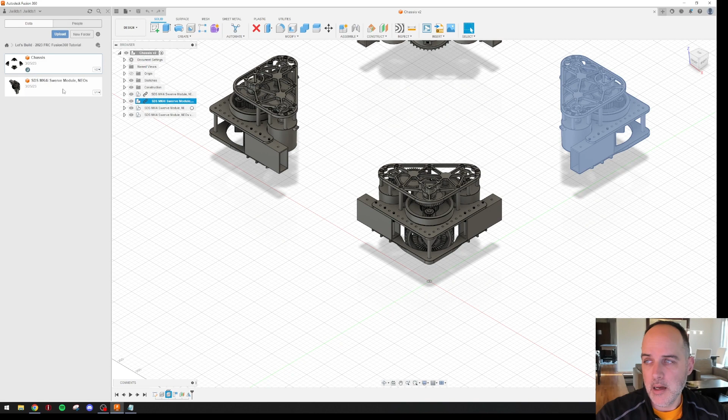So we'll open up those files and find this. Now, one thing I haven't taught yet: you see how I've selected the face of the 1x2 there? I'm going to right click on it, and that brings up a menu. Look at this tree over here, it's three screens deep. I want to find that part, so I clicked on it and I'm going to find it in the browser. This will automatically find that part in the tree for us, so now I can select the whole part, not just the face.

Then I am going to delete that, and hopefully this works. Yep. Then we'll do the same thing for this one: right click on it, find in browser, and delete that. Now let's save this part. Before I click save, watch this area. You see how it says version 1? When I click OK, it'll automatically update, you can see the wheels turning, and this will change to version 2. See, right there. Now watch what happens when I go into our main drawing.

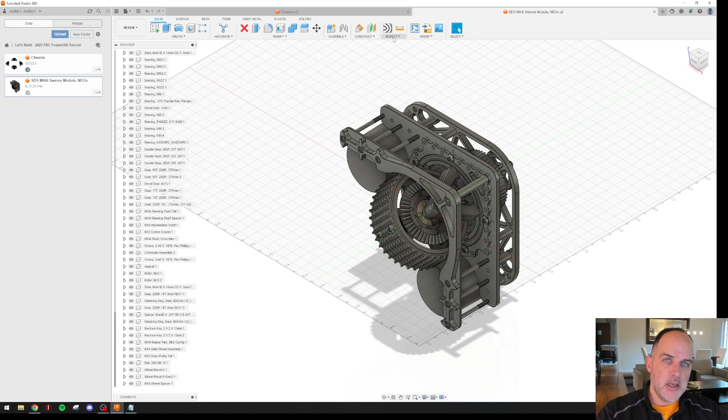The first thing you notice here says this component is out of date; to update, use Get Latest in the design workspace. Basically, Fusion knows I made a change to this referenced part, and this screen shows old data. To update it, I can go one of two ways. One, I can click this button at the top, and it'll update everything; if I had made edits to four different parts, it will update all of those. Or I can directly click Get Latest Version. We'll do that. And there you can see our 1x2 extrusions are now gone.

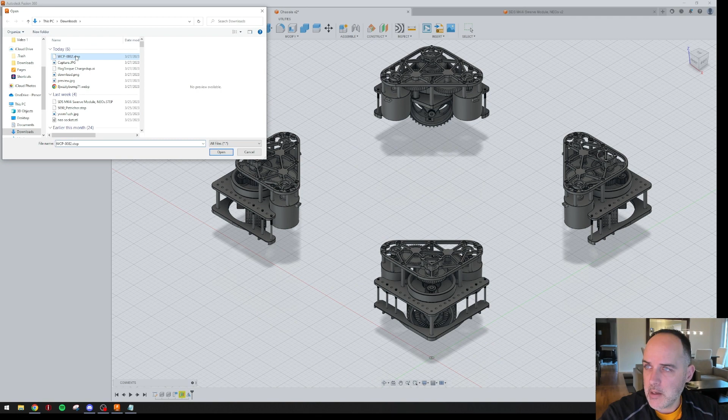Okay, the next thing we need to do is put together our structure of 1x2 aluminum. Unfortunately, the stuff we used, VEX VersaFrame, doesn't have CAD models, but it's not a big deal. West Coast Products has CAD for 1x2 1/8" wall. The only difference is there are no holes in this part, which is not a big deal. I've already downloaded the file, so I am going to upload it. Now wait. All right, it's complete. Close out of that.

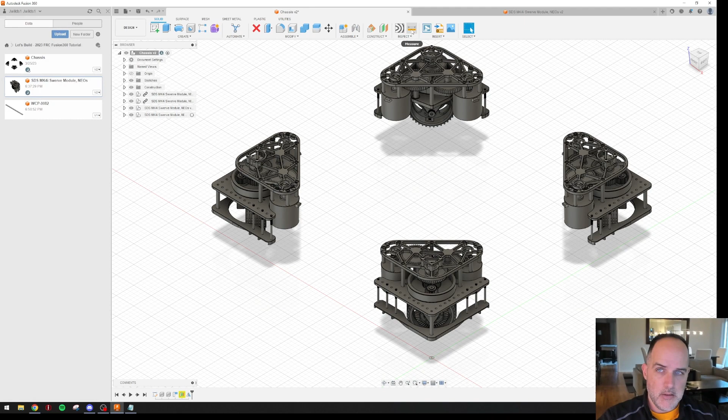So now, how long do we make it? If you noticed, before I blew away those 1x2s, the extrusion started and ended right at the midpoint of this hole. So I need to measure from this hole over to the mating hole over there. We'll zoom in. One thing to remember with the measure function is Show Snap Points, which adds more pick points when you measure. I'll check that box, and turn on my secondary units, inches. Now you can see plus signs in the center of those holes. Those are what we want to reference.

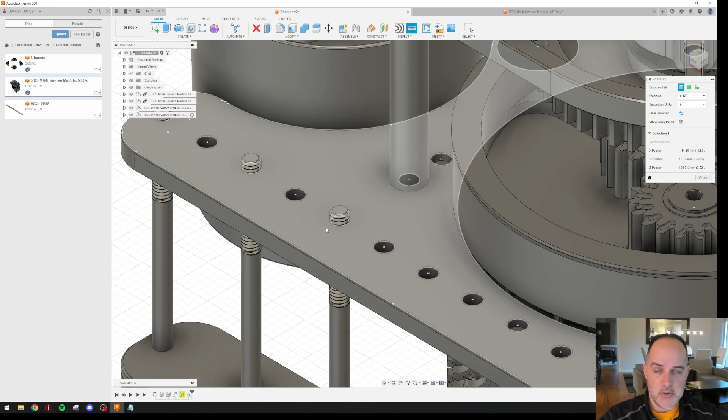Now to make them stick, sometimes what'll happen, you see how when I hovered over this bolt, it bombed onto the threads. But what I want to do is press and hold Control, and that's going to keep those snap points active. So then I'm going to select that snap point, so it's picked the center of that hole. I'm going to zoom out, pan up, and then the same thing here.

I'm going to hit Control, and then I'm going to click on that point right there, the center of that hole, and there's my dimension. So you can see here that's 16 inches. Okay. Now, to get that component right, I'm going to open up that step file. You can see here, long stick of it. I think it was 51 or 59 inches, but I need a 16-inch component.

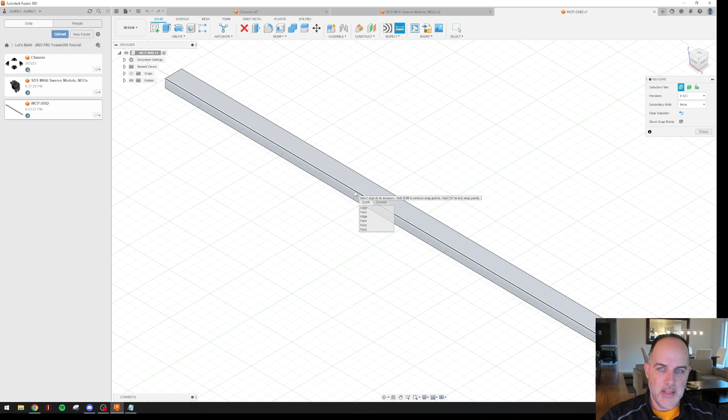Okay, so I'm going to introduce what's called the press pull command. What the press pull command is, it's an operation that lets you shrink or grow parts, mostly flat surfaces. So that's up here in the modify command. But the first thing is I need to know how long this is. So I'm going to hit inspect, measure, and then I'm going to select this edge. Now I got this menu to pop up by clicking and holding on that edge. So I'm going to select that edge.

And it's telling me, yep, it's 59 inches. But I needed 16. 59 minus 16 is 43 inches. So I need to make this 43 inches shorter. So what I'm going to do, I'm going to press pull. Okay. Then I'm going to pan down here. I'm going to zoom in on this surface here, right there. So I've selected that face.

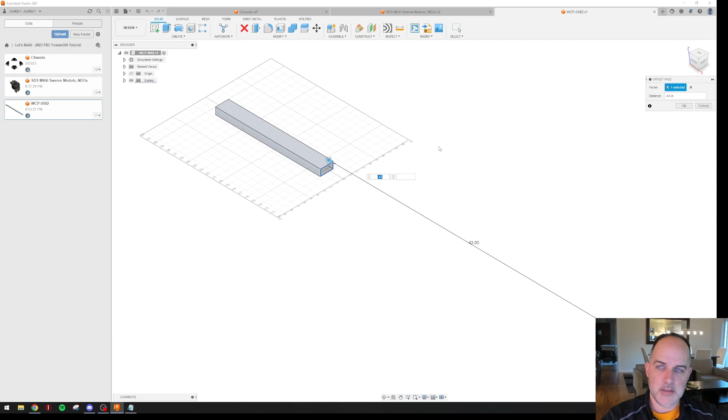And if my memory is right, I said we needed it 43 inches shorter. I'm going to make it negative 43. Zoom out before we accept the changes. Looks about right. I'll click on OK. Now, we've modified this part, but I don't want to lose the original. I want to create a new part out of this. So I'm going to do a file save as, so that way I can make a 16-inch part.

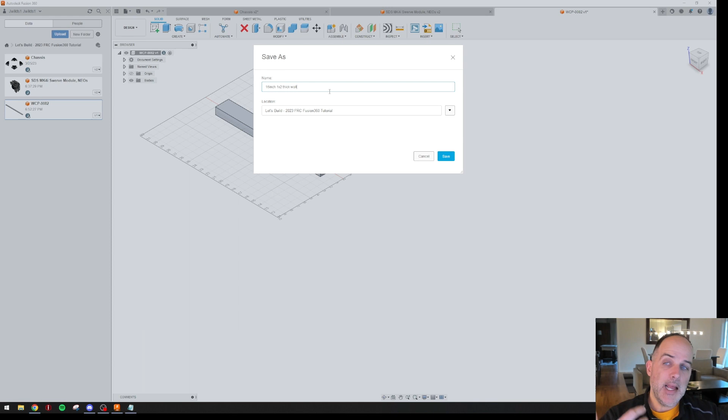So 16-inch 1x2 thick wall. Okay, so that way I know, and I can reuse this in the future. So what I'm going to do is save that, and you'll see here it popped up in this tree right there. So we're done with that part. We can close out of that. And we're done messing around with the swerve module. We'll close that.

Okay, so now let's go ahead and drag in one of these rails. So we now have our 16-inch part in the model, but it's in the complete wrong orientation and position. So let's start moving this around. The first thing we need to do is rotate it so it's on the short edge. So let's do that by clicking and holding, dragging this around 90 degrees. Okay, so now we're gonna adjust this move command.

This move command gives us a couple of options. Right now, it's set up in free move. I can rotate or translate in all three directions. This translate just cuts that in half. I can only translate: up, down, left, right, fore, aft. The rotate command is just the opposite. It limits me to a rotation only. The point to point here is what we're going to use.

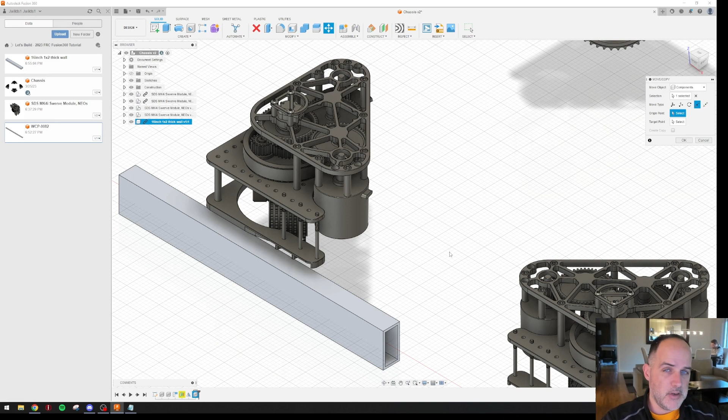What this lets you do is pick a point anywhere on here, mostly on the edges or midpoints, and align that part, that first pick, to another very similar pick. And in this case, what we want to do is get this midpoint, and you can kind of see the triangle right there, right under my mouse. We want to get that lined up with the underside, the bottom side of this surface and that hole.

Okay, so you can see here it's defaulted to origin point. I'm going to zoom in, and you can kind of see it's got a blue triangle there. So that's where I want the midpoint of that edge to be my first point. I'm going to click on it. And then I think I got it.

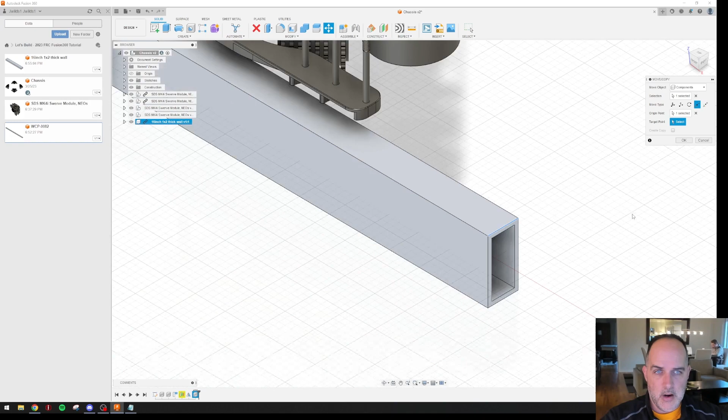And then the target point, we want to be the bottom side of this bolt hole. So again, I'm going to press Control to keep those snap points locked. I'm going to click there.

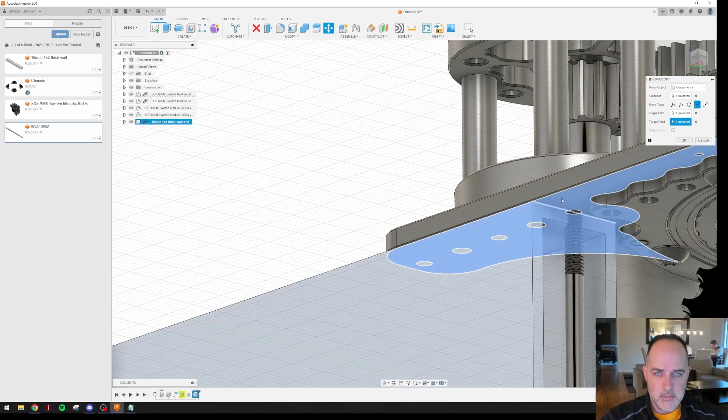And we'll pan out, zoom around. That looks to be right. Okay, so there's our first frame rail. Now I'm going to do the same thing, but 3 more times. So I'm going to drag it in again. And then I am going to rotate it. This time I have to rotate it twice to get the other rails in. So I'm going to rotate that 90 degrees. And then I'll rotate it that way 90 degrees.

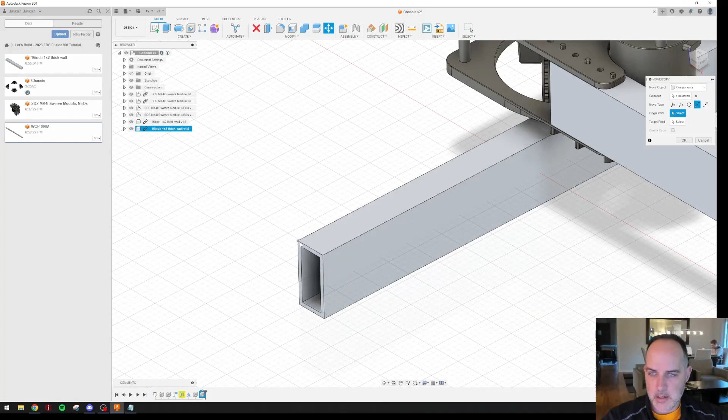Now I'm going to switch to my point to point. I'm going to zoom in here. There's my blue triangle. And I'm going to zoom out. This time, I'm going to use this hole. Again, Control to lock the point. There. Go home. That looks right. We'll click OK. Once more.

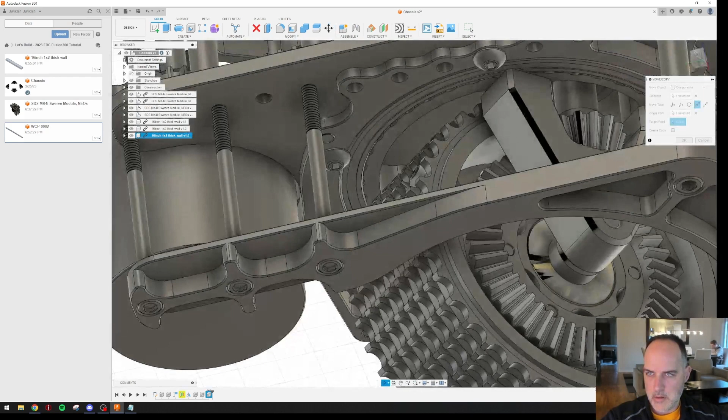Ninety, point to point. There. To there. Looks right. And then finally the last one on the back side here. Add one more in there. 90. Point. Should zoom in, make sure I'm clicking that point there. More. Back home. Looks good to me.

So now that our frames are all assembled, the only thing I didn't go into is the bolt holes. So we'll probably touch on that in the next video. So I'm going to save this and click OK.

Okay, so I know I said we were going to wait on the holes, but I decided let's go ahead and do that. The first thing we have to do in order to create the holes in the tubing is, if you look up here, these extrusions are linked back to the original part that we uploaded and modified and then saved. We have to break that link in order for us to be able to edit these parts. So what I'm going to do, I'm going to select one, and then I'm going to click on break link.

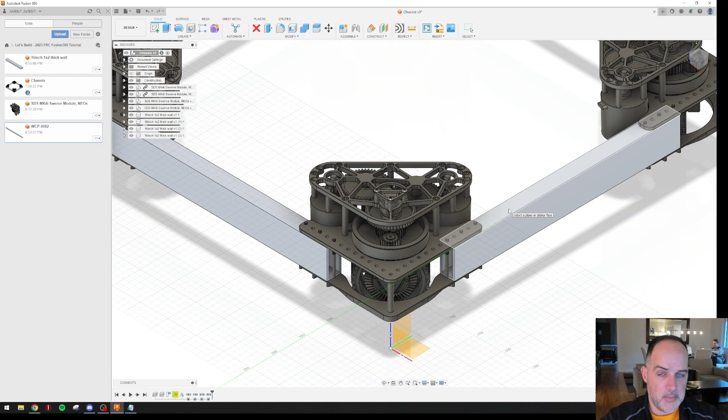So I'm going to type P as in project to bring up a sketch command. You can see here, once I did that, it asks where do you want to place your sketch plane? We don't want to place it anywhere down here. I want to project all that geometry onto this top surface. So we're going to use this top surface as our plane. So I'm going to click on that one. Okay, so you can see my view changed. The view automatically orients itself perpendicular or normal to the plane of the sketch.

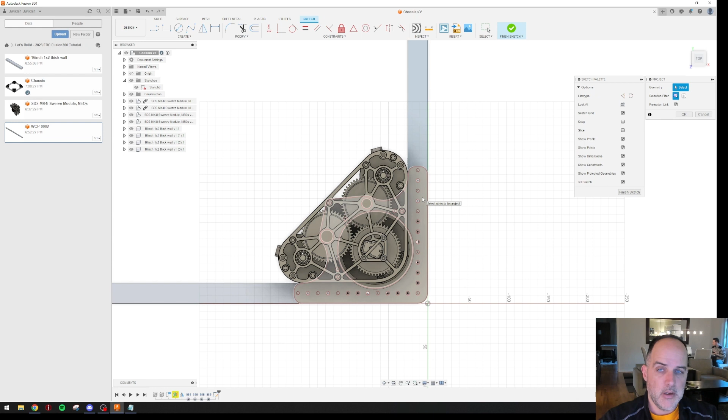Now, what I need to do is choose the geometry I want to project onto that sketch. So in our case, we want this outline of the perimeter of the swerve module, and the same thing up top. So I'm going to select this one. You can see it's outlined in red to kind of show you what you're getting. And then I'm going to do this one as well. So once I get those 2 swerve modules selected, I'm going to click on OK. And then I'm going to go back home. And then I'm going to turn off all the swerve modules so you can see what I did.

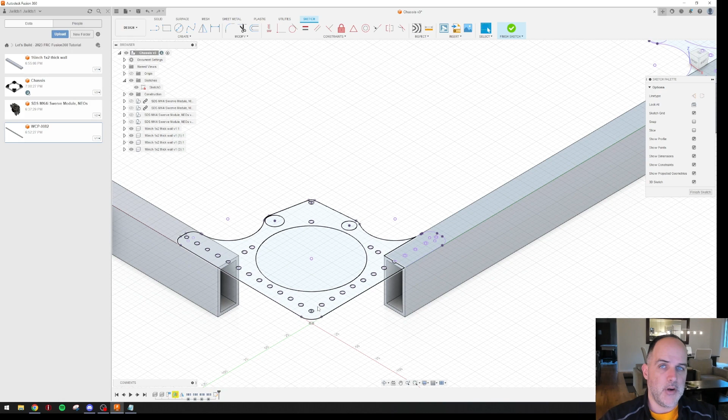So you can see here now, I've got this sketch. This is only a 2D sketch. There's no depth to this at all. That has all of the pertinent geometry we need. What we do need is we need to push these holes through the tubing. So to do that, let me finish my sketch. So to do that, I'm going to use what's called the extrude command. And it's up here under create.

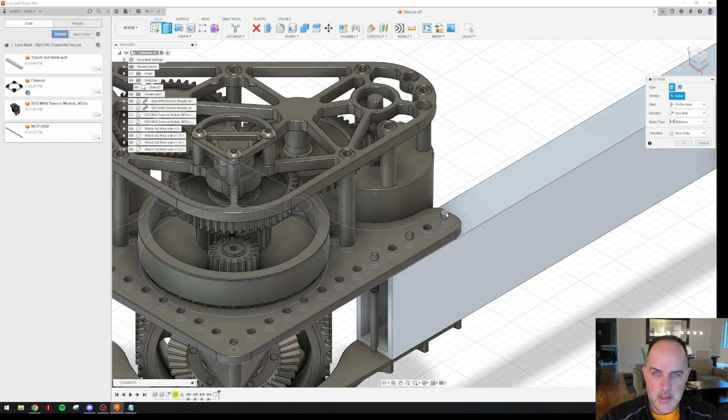Okay, so what the extrude does is it lets you pull stuff out of a drawing and create, or push stuff in and cut. So in our case, we want to push in to cut. I'll show you both. So I clicked on the extrude button, and I can turn the module back on to show you, we want this hole, which is really only a half hole. We want this one, and we want that one. So let's turn that module back off so we can see what we're doing. So I want to extrude this one, and the half hole.

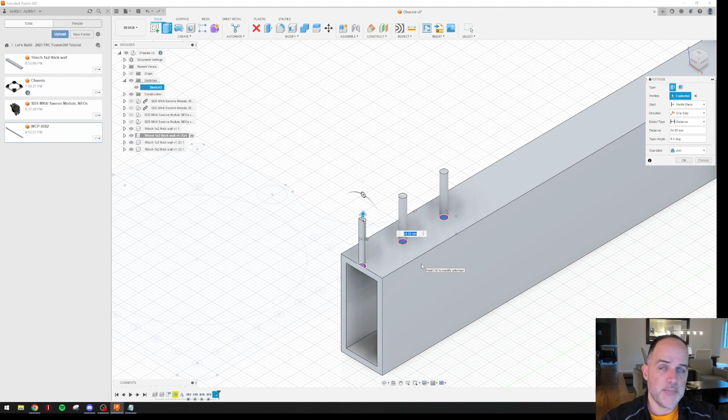What we don't want in our case is to pull it out. So you can see here, I've made nubs or pegs that are coming out of this 1x2. We don't want that. What we do want, though, is we want to go in the opposite direction. Okay, you can see here, because it's turned red, I'm actually cutting, and you can also see it over here in the operation. There are a couple of different operations you can do.

99% of the time, it's going to be join, cut, or new body. We'll get there when we need to. But again, you're going to spend most of your time using join, cut, or new body. In our case, we want it cut. Looks right to me. And then we'll click OK.

So there you can see our sketch disappeared because Fusion 360 thinks we're done with the sketch. We're kind of not. But we've now created the holes in our part. Now we're going to turn that sketch back on, and come over here and do the same thing with the holes on the other tube.

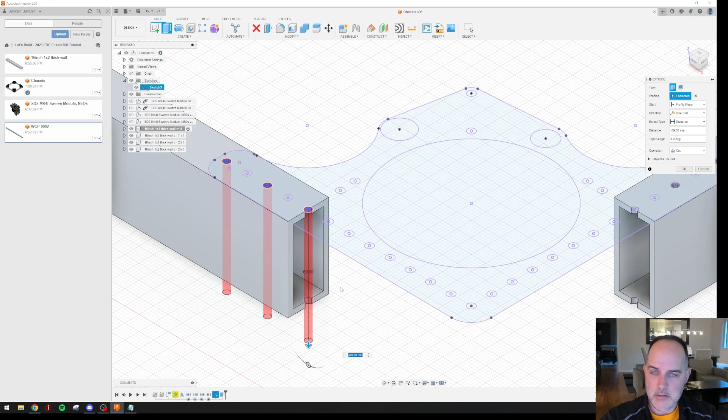So again, 1, 2, and we'll do that. And we will bring it all the way down. Again, it doesn't really matter as long as I cut all the way through both walls. We'll click on OK. And we'll do the same thing for these two. Now we can do it all in one command too. So I'm going to do this.

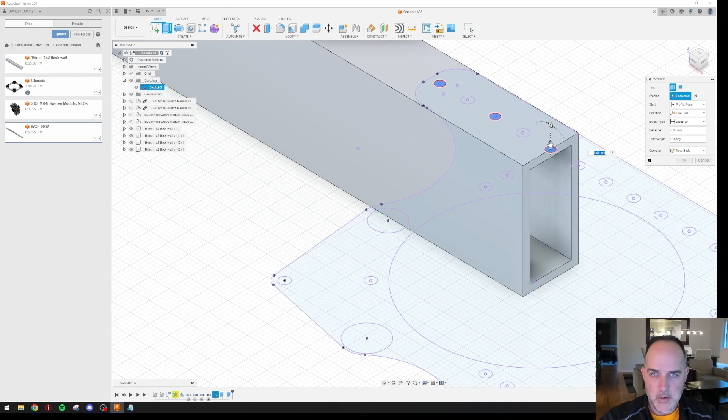Oop, not that one. Now if you misclick and add something you don't want to extrude, you can click on it again. You can also come up here and clear the entire selection out. So if I click on this, it starts me over. So I want this one, and this one. And we will zoom up here, do this one, that one, and that one. We'll bring those down. Okay. So we're halfway done.

We need to do another projection of the other two swerve modules. So I'm gonna go ahead and turn this sketch off. I'm gonna turn my swerve modules back on. And then I'm gonna do the same thing starting with the projected sketch. So I'm gonna type P. And again, it's asking me what plane do you want to place the sketch? We're gonna go right here. And then it's asking us what geometry do we want to project. I want that one in red, and I want this in red. Click on OK.

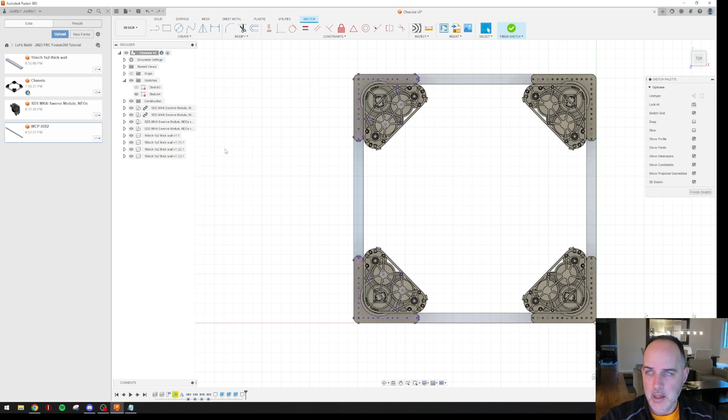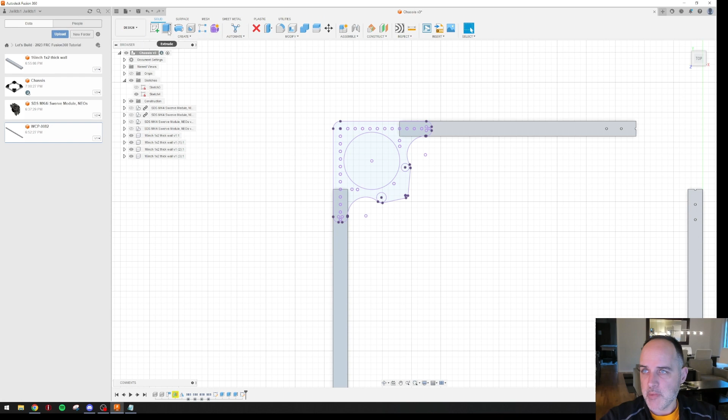And now, again, see what we're doing. I'm going to turn the swerve modules off by clicking on those. Now I'm going to do all of these holes in one command. So again, create. Oh, I have to finish my sketch. I'm still in sketch mode. So I need to finish my sketch. Now I'm going to do all of these holes in one command.

So I'm extrude. And then select that hole, that hole, that hole. Come down here. Do that hole, that hole, that hole. Zoom out. Pan, zoom in. That hole, that hole, that hole, that hole, that hole. And then to check my dimensions, I'm gonna come on down here where my last arrow is. Come all the way down. Click OK.

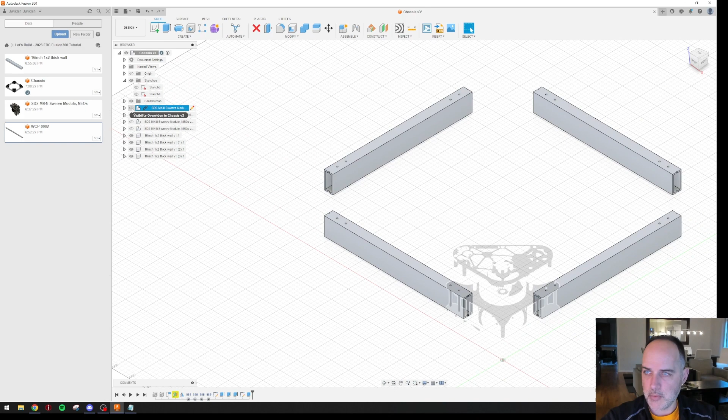And there we go. Turn my swerve modules back on so I can see what I did. And we're done. We're done with the holes at least. So I'm going to save my work. And then we're going to get into a little bit more part creation with the belly pan. And then we're going to get into more creation with some bumpers.

Okay, so now that we got the aluminum structure in there, all the holes are in, we're going to start working on the belly pan. I don't know about you, but our team, we just use 1/4 inch Lexan on the bottom. So to do that, we need to make a sketch. We're going to create one of our first components.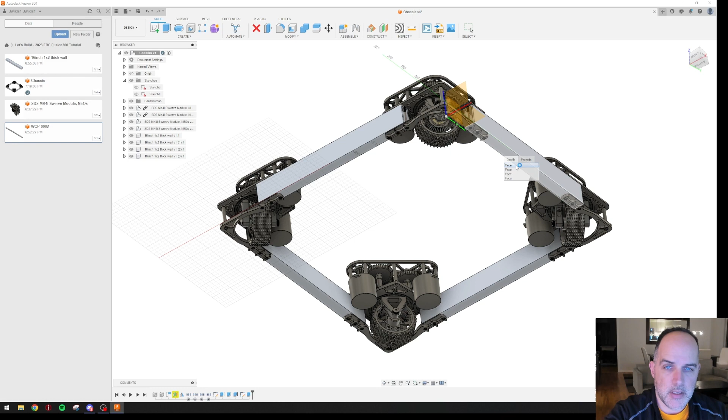So to do that, I need to create and project a whole bunch of geometry onto this bottom plane of the 1x2 structure. So I've panned down to the bottom of the robot, and I'm going to project by pressing P onto this plane. Okay, so now select that. Okay, now we need to select what geometry we want to project. So the first thing, we need the 1x2 because that is going to represent the perimeter of it, but we also need to make some cutouts for the modules themselves.

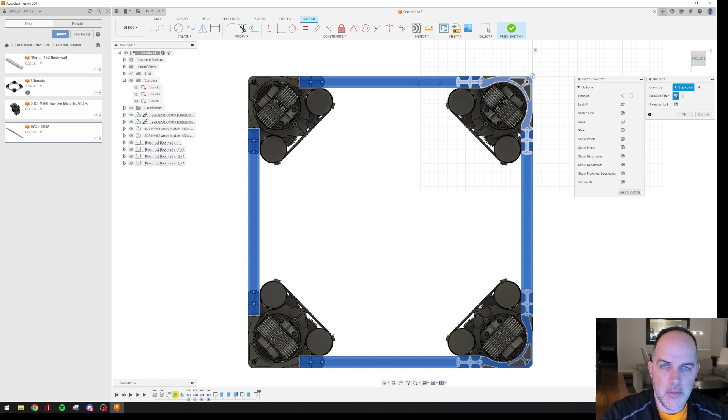So the first thing we want to grab is the 1x2 structure by selecting those four 1x2s. And the other thing we want to grab is this bottom bracket for all of the swerve modules, because that's going to represent where we make our cutouts. So we're going to grab this, this, this, and this. So once we've grabbed all that info, we're going to click on OK.

And we can start finishing our sketch. But to do that, we're going to first turn off all the swerve modules. We're going to turn off all our geometry just to make things a little bit easier to see. So you can see this sketch here is really complex right now. Not to worry. When we go and extrude our belly pan, we can ignore a whole bunch of this stuff. Okay, so now we've got all this info.

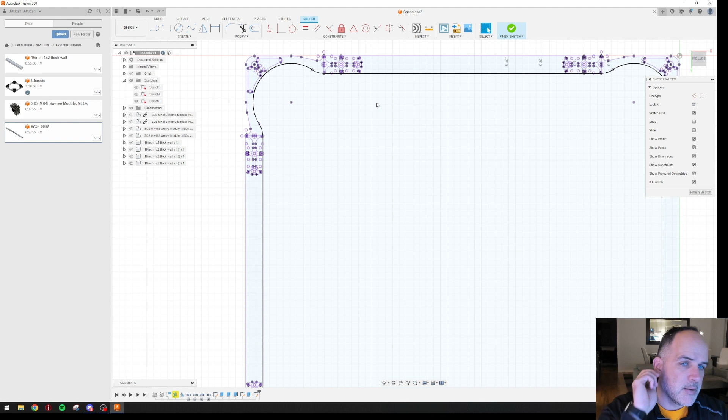The easiest thing to do would be to just make some kind of right angles or 45 degrees coming off of this belly pan. So I'm going to create a line. This is kind of the outside structure of the belly pan. I'm just going to pick a point along this edge and come out maybe another inch or so. It doesn't have to be precise, doesn't have to be perfect. And then I am going to draw that line. Once I'm done, I'm going to hit enter. Okay. I need to delete that segment.

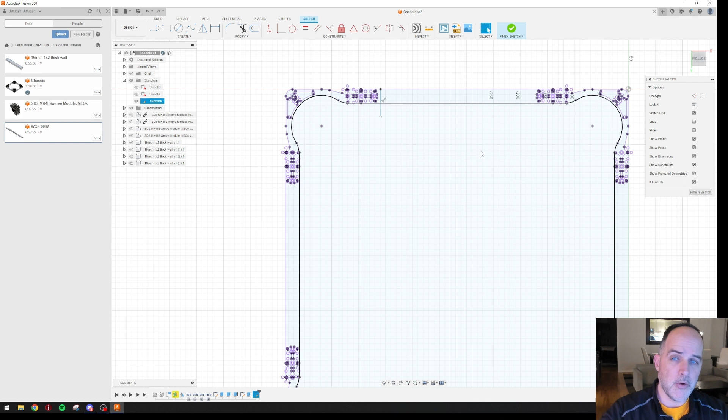So we've got that, but to make things easier on ourselves we want to create some construction lines about which to mirror a whole bunch of things. To change into our construction line mode, we come over here and change the line type to construction. Basically what that does is says ignore it when you're actually going to create geometry or extrude. So we're going to draw an X pattern in construction lines so we can start mirroring stuff around those construction lines.

So I'm going to select the center point of that down to here, and then I'm going to hit escape to cancel the line. I'm going to do another one from that center point there down. Okay, so I've got these two construction lines now. Like we did in the 3D part, I can mirror in 2 dimensions as well. So I'm going to mirror that line I created about this line. You can see here, it basically takes this whole thing and flips it about that line. I'm going to click on OK. And we're done.

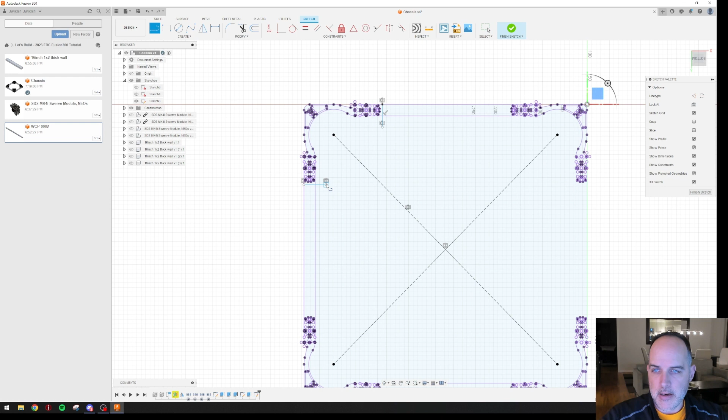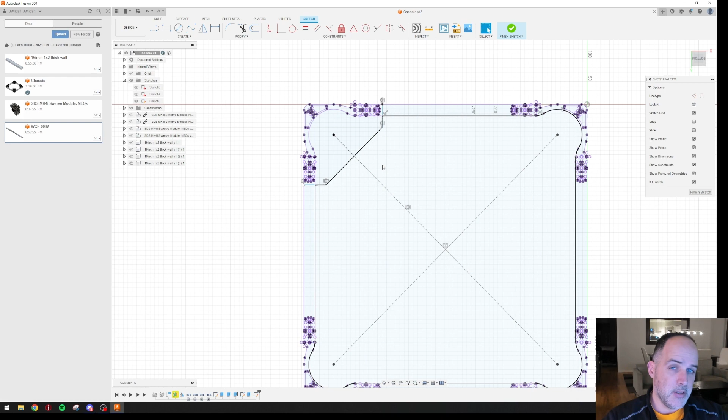Now I need to finish that cutout by connecting those 2 lines. I'm still in construction line, so I want to toggle that off and create a line from there to there. Okay, I'm done with creating that line. I'm going to escape. So now you can kind of see where we're going. Now, here's another trick for you. Because I've got this center point and a square frame, I can create what's called a circular array. It will take these 3 lines we created and clone them as many times as we want in a circular pattern around a defined point. In our case, this is our center point. We're square, and we want three more of those to cover these corners.

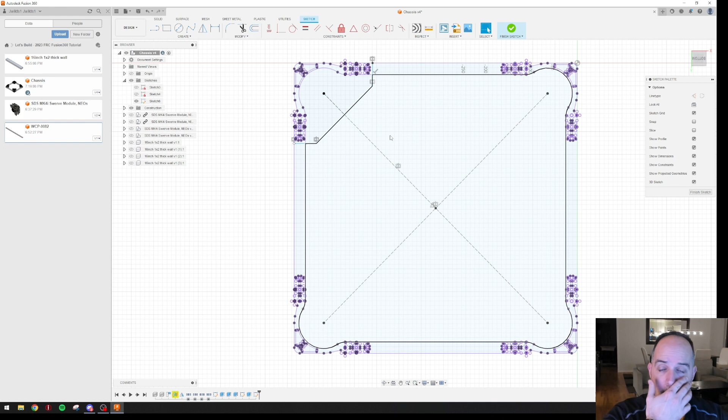So I'm going to come up to create and click on circular pattern. Now it asks what objects I want to copy. So I'm going to select the 3 lines we created, just like that. Then I've got to pick a center point. It's not letting me pick that point. Because there is no defined point right there, we're going to create a point right there. Okay, it defaulted to the midpoint there. So we now have a point there. Now we can go ahead and create our circular pattern.

We'll come back up here. Circular pattern. Like that, that, and that. Now, if we're lucky, I can select that point as my center. It worked. So now it's set up to give me 3. I don't know why it does 3, it just does. But we want to create 4 of them around a full circle. We can do a partial one. If I wanted to do 4 and 90 degrees, you would see here that it's all messed up, but we want to do a full one.

You can see here, this is where one's going to be created, another one here, and another one here. That's set up the way we want it. We'll click on OK. Great. So now we basically have the entire structure of the belly pan, which is this kind of octagonal area, plus these little sections right here. Okay, so this might not work. We'll try it. So we'll go ahead and finish the sketch.

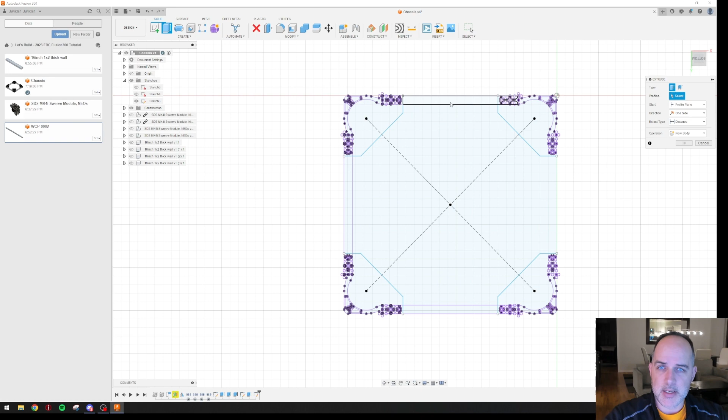Now what we want to do is create an extrusion with some of this geometry. You can see here, this isn't going to exactly work. It wants to bring in this geometry over here as well. For some reason, I don't know. Everything else, oh, same thing down here. Okay, so we got to go and fix our sketch.

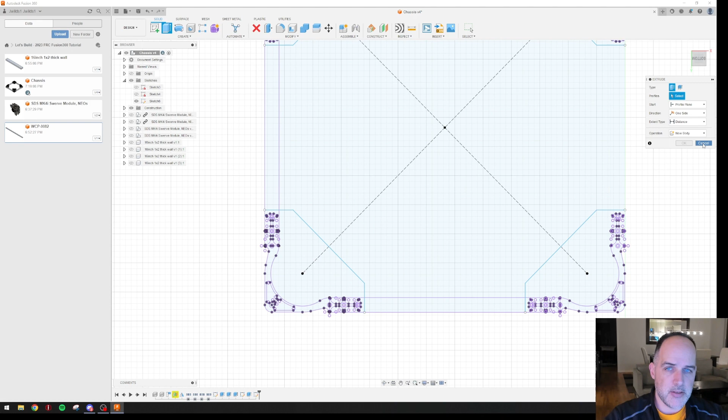So I'm going to cancel this extrusion, and then I'm going to come back. This is the sketch I've created, and I'm going to edit that sketch. Now, for some reason, it didn't like this geometry in this area here. It didn't see a closed line, and the same thing for this. So first things first, a lot of this stuff we're going to blow away. I'm going to drag a window, and then I'm going to hit the delete key.

Blew that away. Blow this stuff away. We'll blow this stuff away. Blow that away, whatever that junk is. All right, we'll blow this stuff away. Here.

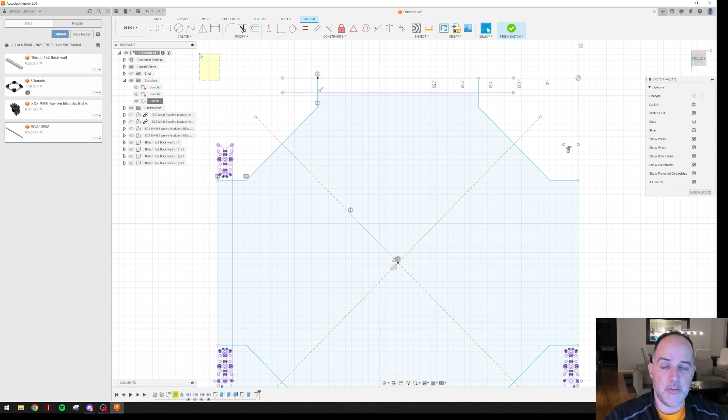Here. Now, one thing I should mention, you can see here, when I click and drag this square and it's a solid outline, that means only things that fully reside inside of that square are going to get selected. Now, if I drag it the other way, you can see how it changes into a dashed perimeter. That means anything that crosses or is inside the box will get deleted. And I'll show you how that works.

So now I'm going to come down here. I'm not going to hit the delete button because these 2 lines crossed that dashed line box, so they will get deleted, and we don't want that. Okay, so to cancel out of that selection, I'm just going to click anywhere in the white space. What I do want is that stuff to get deleted. Okay, come down here, clean up some more of this junk.

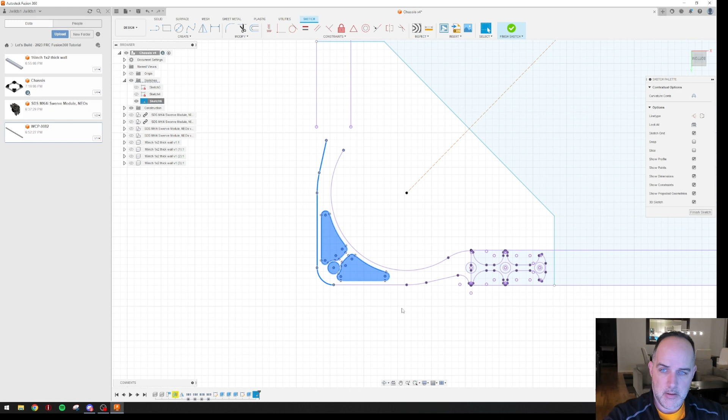Now I'm going to select the crossing box just like that to delete that stuff. But then I'm going to use a normal box, select that stuff. Come down here, delete more junk. Delete. We'll do a crossing box for this, delete. And then the last is we'll do that. Okay. So now we've cleaned up this sketch a whole heck of a lot.

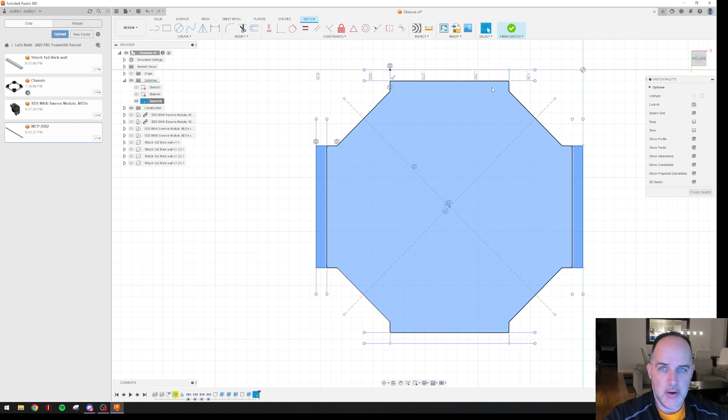You can see here now, I can select this region by clicking inside of it. I can select this region by control clicking. I still can't select this one, and I can select that one. So that tells me there's still something up with these two boxes. What we're going to try and do is fix that.

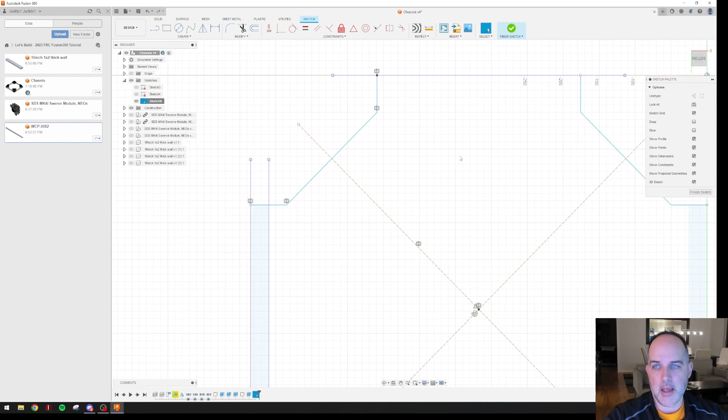So you can see how these lines cross over the blue line. So what we're going to do is first trim that. And you can see here, this isn't working. So let's just blow that line away. We don't even need that line. Same thing here. And actually, now that I'm walking through it, just deleting these interior lines should work. Oh, there's our problem. We don't have a line.

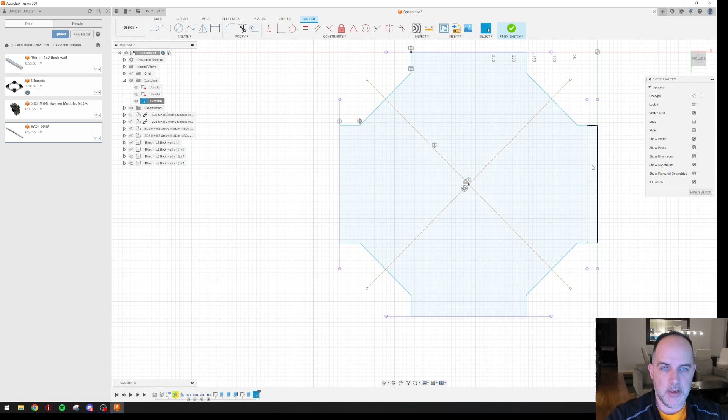Got two problems there. All right, so let's close this region up by going from there to there, and there to there, there to there, there to there. Okay, you see how the shape changed color a little bit? It went light blue. That means we have a fully enclosed region now. Let me delete that line. Okay, we now have a fully enclosed region, which we can go ahead and extrude. I'm going to finish this sketch.

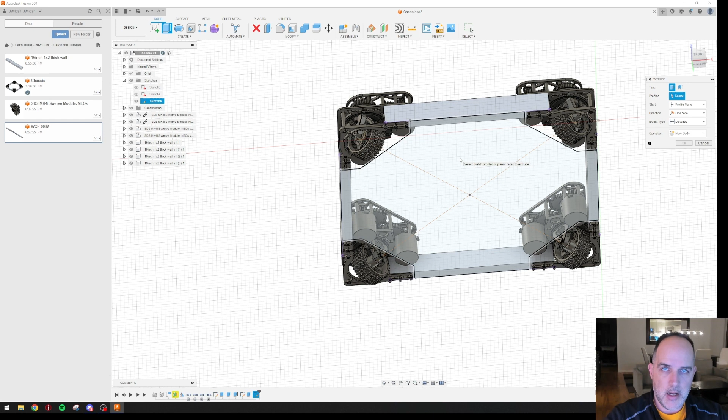Okay, I'm going to turn everything back on so I can see what I'm doing and see the results of my extrusion. And we haven't extruded it yet. All right, now we can go ahead and extrude our cleaned up sketch. You can see this sketch in the dark black outline is what is going to get extruded. I click on that. It's in the right direction. We want to extrude it down from the 1x2 tubing. And we want to do it a 1/4 inch Lexan. So we do 0.25 in.

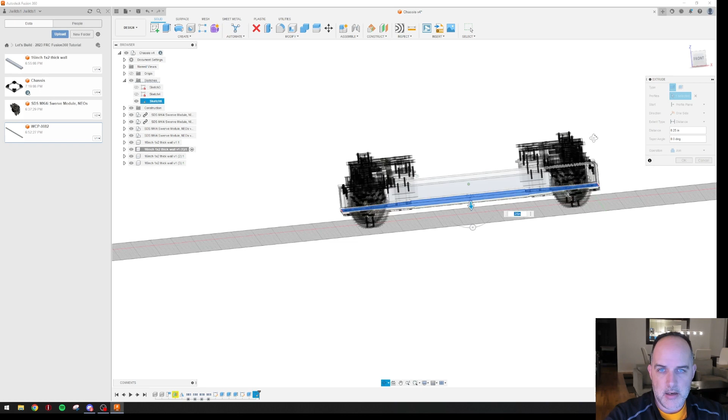Now, this is where this operation will come into effect. If I were to just click OK right now with it set at join, it would physically weld this piece that we just made to that 1x2 tubing. We don't want that. We want it to be its standalone thing. So to fix that, I'm going to drop down this operation box and click on new body. I want it to be on its own as a separate entity.

So you can see here the view changed, and now it looks like it's correct. So we'll click on OK. There we go. So now you can see here our sketch went away, but where's our part? Where's the part we just made?

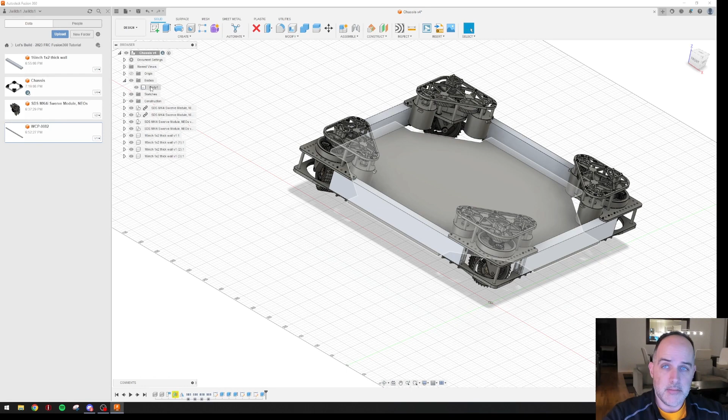Anything you create with an extrusion as a new body shows up in here as a body. So there it is. So we've now created our belly pan, but let's turn that into a component. So this is going to be something we'll use a little bit later on, where you can give items names and set components. So what we're going to do, we're going to come up here to this assemble new component.

It significantly helps you arrange your product tree. We're going to create a new component. Now, what it's asking us now is, what is my parent component? So if I wanted to nest something inside of one of these components here, I could do that with this. In this case, though, the parent is everything.

So if I were to clear that checkbox out, I can select 1x2, put it under the 1x2, or clear it out. I can put it under this, under the NEO. I can't do it because those are linked. But what I want is, I want it just in the chassis. So it will show up right underneath at the bottom of this tree. So we'll just click on OK after.

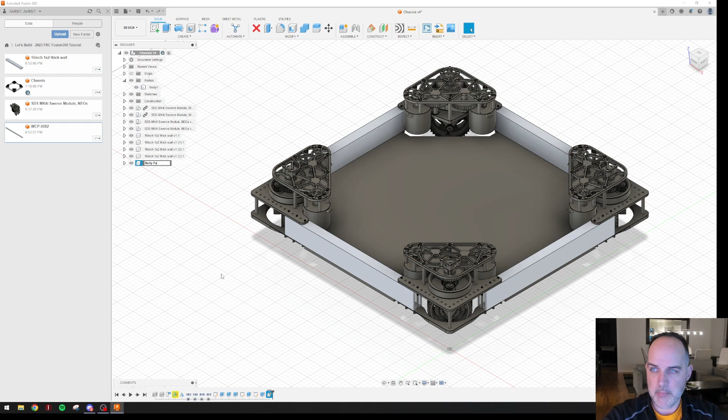Let's rename it by right-clicking on it and coming down here to rename. We'll just call it belly pan. And we're done with the belly pan. So you can see here we got pretty good cutouts for everything. Our swerve wheels aren't going to hit anything, so we're pretty good there. So we'll save it. Next, we'll get into bumper creation.

Okay, the last thing we're going to do with the chassis, before we can call the rolling chassis officially done, is create some bumpers for it. I had to go back and see what the dimensions were for the bumpers we made for our season robot. So I pulled that old version up. So I'm just going to use that as a reference. I'm going to be bouncing back and forth just to make sure the sizes are right.

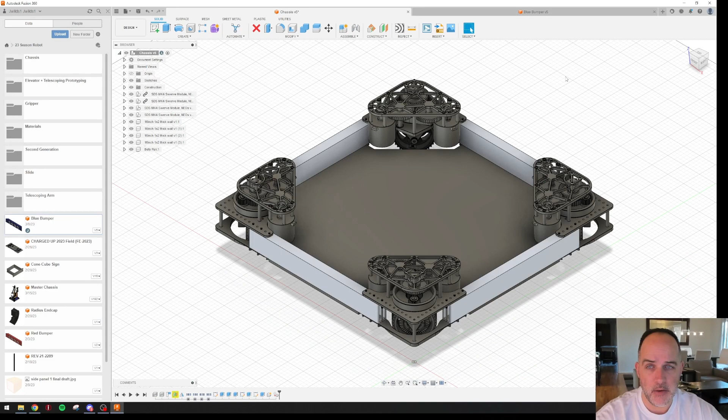So I'm going to go back to our main drawing, and you kind of want to align the bumpers with the bottom of the belly pan. And so the first thing we're going to do is create a sketch on the plane of that bottom surface, that bottom 1/4 inch Lexan. So I've clicked on create a sketch, and I'm going to zoom or pan underneath, and I'm just going to select the bottom surface of this belly pan.

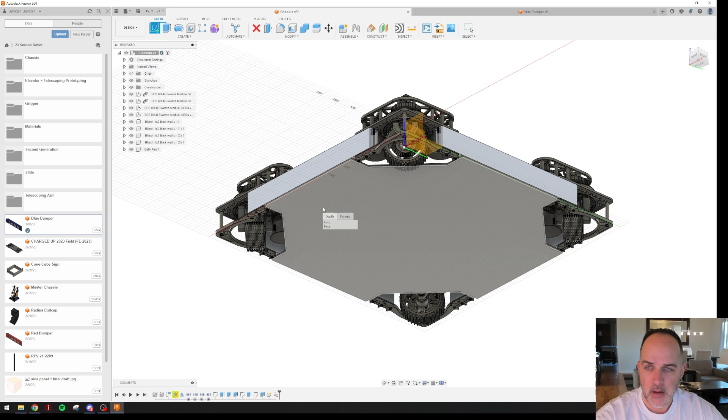Select the face, and this menu typically doesn't pop up all the time. It's just I'm clicking and holding for some reason. So there. Okay, so it adjusted my viewpoint. So now what I'm gonna do is I'm just gonna create a 2-point rectangle, from one corner of the belly pan to the next, and then we'll fix and add the 45s later.

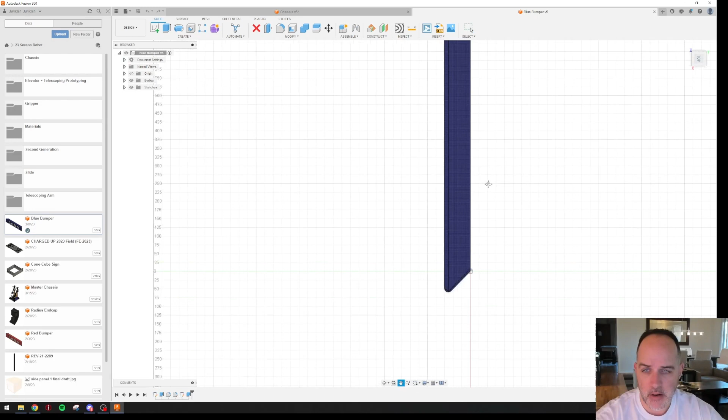So actually first, I'm gonna come into the old drawing and measure how big these are. So we're gonna go inspect. I'm gonna measure from that point back here to this point. But here's another thing. When you inspect and do measure, it initially only gives you the straight measurement. If you come over here and change the XYZ delta, this was a new add, you always pick the third one. And what that'll give you is the XYZ delta. And these colors are referenced back to your view cube up here.

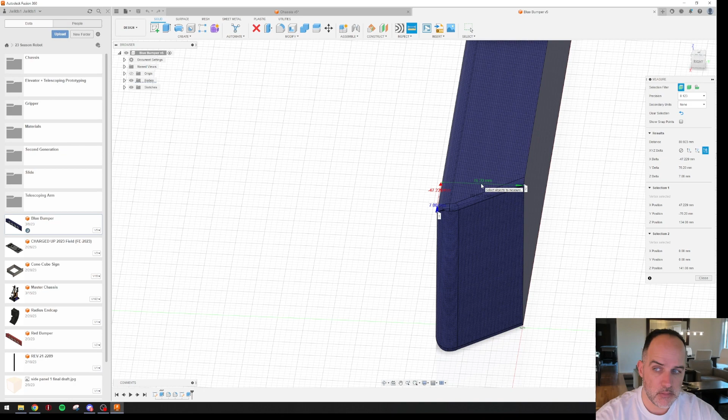So right now, all I really care about is how thick these are. And they are 76.2 millimeters, which is, I believe, 3 inches. Yeah, doing the math in my head. So 76.2. All right, so first thing, let's come over here.

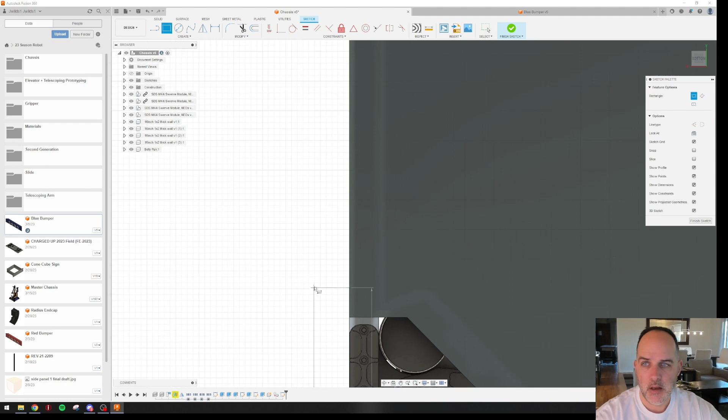Now, because of where everything is located on the robot, we can use this origin, the 0, 0, 0, as our first point. And then we'll pan all the way up. So like that. And then I'm just going to click on some point in space out here. Okay.

So we've got roughly the dimension we want. But in order to get precise, what we can do is this sketch dimension here. What that does is it allows you to put constraints on it. So I want to come out there. So my rough view of it was actually 105 millimeters, but we wanted it 76.2. So I'm going to type in 76.2 in there, and you'll see what happens is our rectangle is going to shrink.

See? So now this dimension, if I somehow wanted to make it 150, I could double click on that dimension and type in 150 and it'll grow. So anything like that, once you add a dimension to it, just double clicking on the measurement and changing the value will change the size of it.

So this is well and good, but we need them triangular, right? Or we need to add some 45 degrees here. So what I'm going to do is come back up here to this line, and from that point, I'm going to come over here. Now, when I drag this line out, you can see there's two boxes. One shows distance, how long I want to make it. So if I punch a number in here, 75, that line will always be 75 millimeters. I can wrap it around whatever degree I want. Or I can cancel. I'm going to cancel that command.

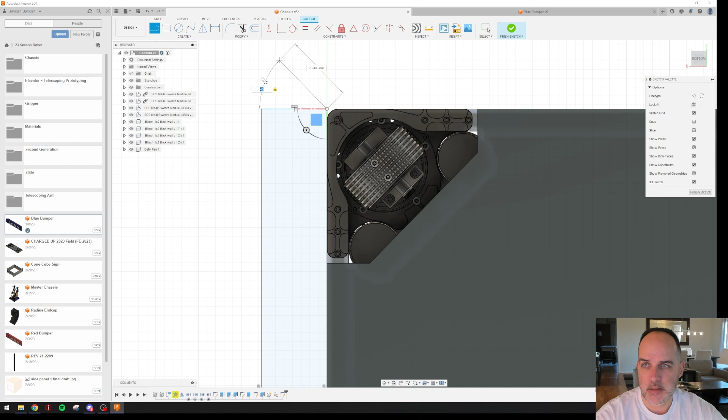Or the other thing I can do is hit the tab button to change over to degrees. In our case, we want 45 degrees. You can see the angle there is referenced from the line there. So I'm going to come out 45 degrees. So this line is now constrained to being 45 degrees. So what I'm going to do then is drag it up and right there. See how I've got my projected dashed line there? I'm going to click on that, come down to here, and then I'm done. So there's one of our corners that we need.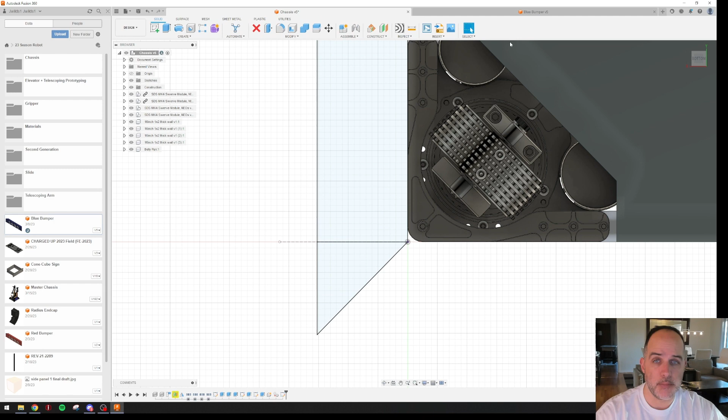I'm going to come down here. I'm going to do the same thing. I'm going to come over here, drag this out roughly. I need to tab over to the angle, make sure it says 45 degrees, and then start slowly creeping it out until I hit that extension, and then I'm going to drag it up and close it out. Okay, so we're done with one bumper. Well, at least the sketch of one bumper. So let's go back home. Okay, we ended up on the left side.

All right, the other thing I need to measure now, referencing from the other bumper, is how tall these are. So again, I'm going to inspect. I'm going to go from here, get a little bit better view, to there, and those are 146 millimeters. This time I didn't need to change the XYZ deltas because I got a perfectly straight line vertically. All right, so 146 millimeters is how big we want that.

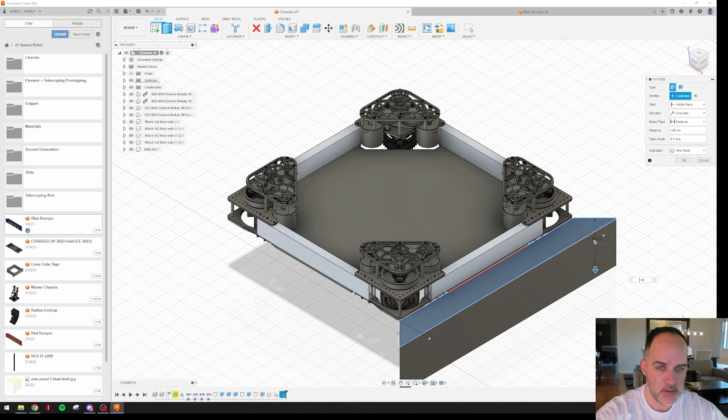I'm gonna extrude. Now, because I drew the rectangle and then I drew these triangles on the side, you see how it's allowing me to pick individual shapes to extrude. I'm gonna need all three of them. 1, 2, 3. Check the direction of this. If I were to just type in 146, it'd push them down. We don't want that, right? So I need a negative 146.

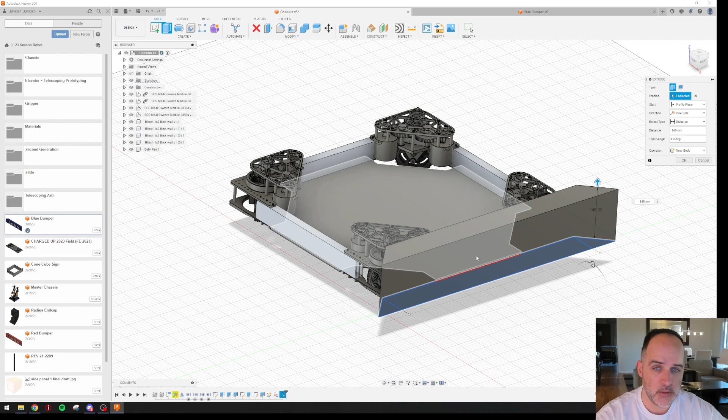Again, because we made a sketch on that bottom, the belly pan, it wants to join them together. We don't want that. So what I'm going to do is create a new body. Now the drawing looks normal. Everything looks great. We'll click OK. All right, so now we've got one bumper. Let's clean it up a little bit. If you look at this other one, we softened some of the corners up. So let's do some of that.

We're going to use the fillet command to do that. Again, we've got a solid body now. So I'm going to use this fillet command. With the fillet command, you can either select individual edges, so I can just do this one edge that I've got my mouse on. Or if I select a face, it'll find all four edges, or as many edges as your face has, and it will fillet them all the same dimension.

So I'm going to click the face because I want the face of this to be all the same, and we're going to play around with it. We'll call it 5 millimeters to begin with. That doesn't look soft enough, so let's call it 10. That looks pretty good. Okay, so we've got our more realistic bumpers.

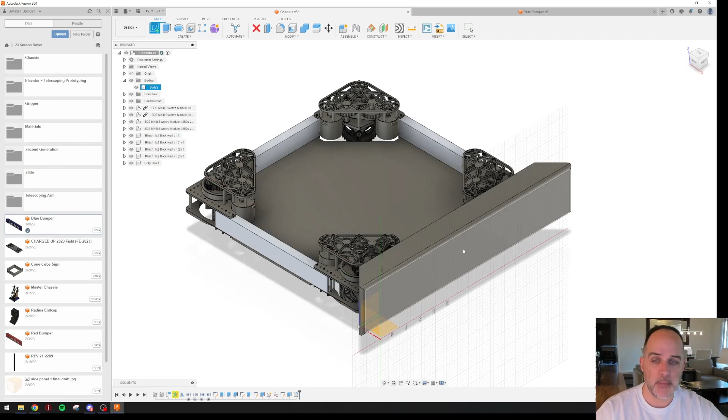I'm going to show you a little trick now on how to do the numbering in them. The way you do that is you do what's called an emboss in the component. So I'm going to put a sketch on the face of this bumper, and Fusion 360 has a text command in the sketch option. So I can create text here. So I'm going to drag a box from here, if it'll let me, once my computer catches up.

We're going to go down to here, and hopefully my computer doesn't crash. There we go. All right, so I got it roughly the size of the surface of the bumper, and you can just barely make out sample text. All right, so I'm going to add our team number in there, 5090.

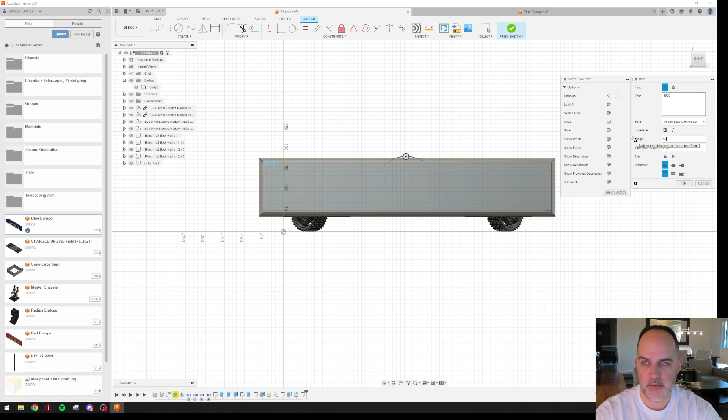And then we have a branding standard, which is Copperplate. If I can find it. Scroll it down. And it uses any TrueType font you want that you have installed. We've got to change the height, so let's try 50 millimeters. Not big enough. 90 millimeters. Let's go 110.

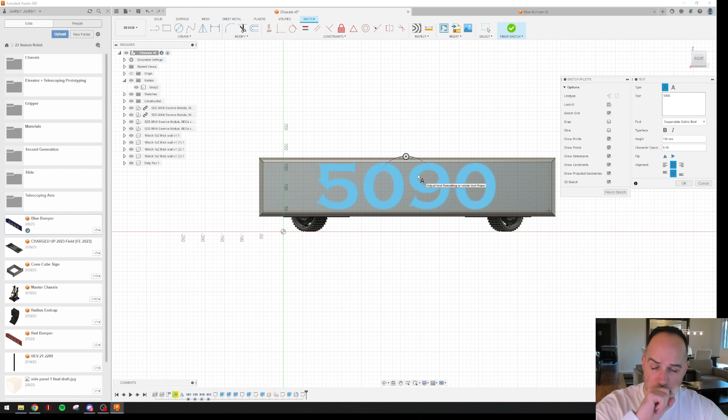That looks about right. And then you can change the alignment. So I'm going to do the left-right alignment in the center, and because I basically made it the whole surface, I want the up-down alignment centered. So you can see I got the numbers for our team on the bumper, and we'll click OK. So we're done with the sketch.

We'll finish it up. Now what I'm going to do is extrude. Let me fill that profile. I'm going to extrude that text into the bumper. So I'm going to cut out just a little bit of that bumper and give a depth. So I've selected my text. I'm just going to do -2 millimeters.

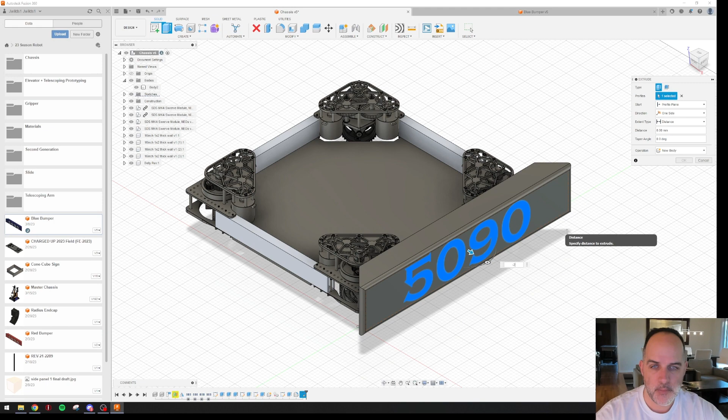You can see it just kind of barely cuts in there. Don't need a lot. And we'll click OK. So now we've got our bumpers. Before we go into copying all three, I'm going to save my work. And then the first thing is we're working with this as a body. We want to turn it into a component.

So I'm going to click on that body, and then there's an option here, create components from body. We'll do that. It comes down here with a boring name, component 62. So let's fix that. Let's just call it bumper. And to rename it, all I did was select it once and click on it again. That's all you've got to do.

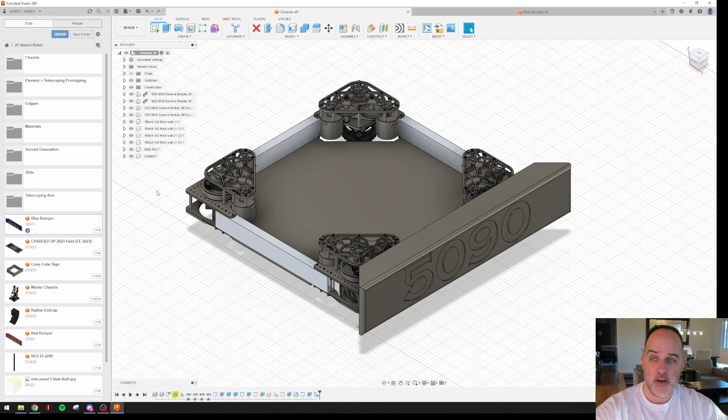So now we can copy this all the way around. Copy that bumper. So I'm gonna right click and then move/copy it. Over here, I want to create a copy, so I'm gonna click that checkbox. And then we'll make what we'll call the front bumper. I'm calling bottom left the front. So the first thing I need to do is get it into the orientation I want, facing bottom left.

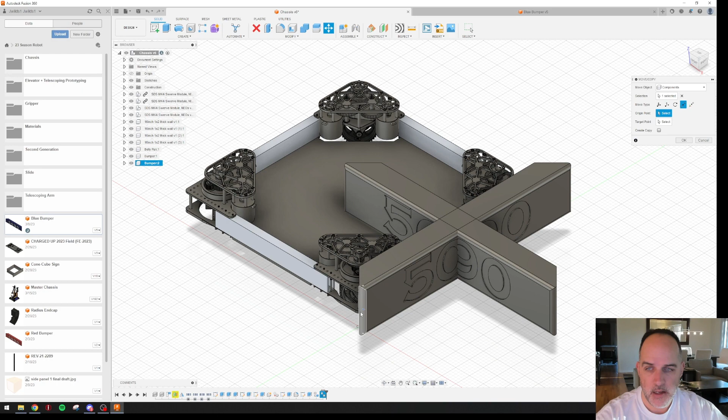So I rotate it 90 degrees, and then I use a point-to-point move. So I'm gonna select this corner right down here as my origin point. And then I'm going to select this corner right here. Okay, here's one thing. Sometimes when you switch back and forth, your origin point and target point get mixed up. So if it doesn't move, you've messed this up.

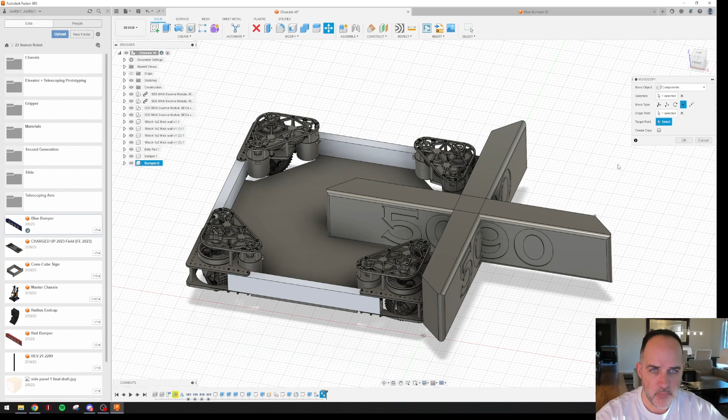So we're gonna reselect our origin point back here. There we go. Now we're on our target point right there. That's in the right spot. We'll click OK. Then we're going to do the same thing. Move or copy. I need to do a free move first to get it in the orientation, and I also need to do create a copy. So we'll rotate that 90 degrees, and then do our point to point. Make sure I got origin selected. Nope. Target point there. Looks good.

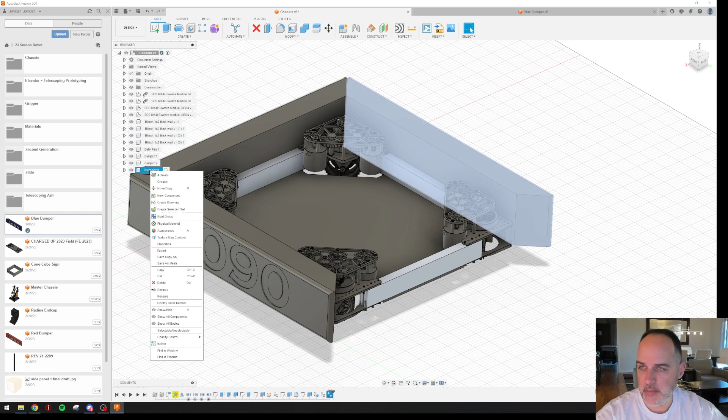Last one is the back. So we'll select one of them, doesn't matter which one. We'll move or copy. Change it to a free move. Make sure we're creating our copy. We'll rotate it into the correct orientation, 90 degrees. And then we'll do our point to point. There. And so you can see what I'm clicking a little bit better. To there. That looks good to me. So we'll go home. So that's our robot, our rolling chassis as it is right now.

That'll be it for this video. I'm not going to go into the appearance stuff yet. We'll save that till the end when we get a cool looking robot and try and make it look even cooler. The next video, we're going to go a little bit more into the philosophy that is rattling around my head as far as the design of this robot. And we'll see if we can get a guest in to help us with the design of what this robot is designed towards, and that's the intake.